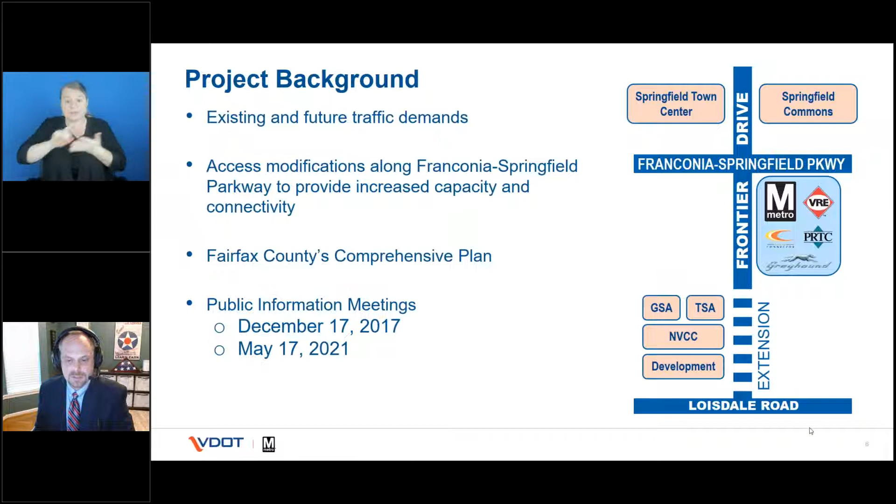This next slide shows the project location area in its entirety. This includes the extension to the south to Loisdale Road, the introduction of braided ramps to the north at the interchange with the Franconia-Springfield Parkway, and the circulation area around the Metro station.

The proposed improvements will enhance traffic operations and traffic safety by providing increased capacity and greater connectivity, provide improved accessibility to the Franconia-Springfield Metro station and businesses located along Springfield Center Drive, and improve pedestrian and bicycle facilities throughout the corridor, all while reducing congestion levels on regional roadways.

Next, to talk about the specific details of the project, Bob Kalbach, our consultant design manager, will walk everyone through the design. Thanks, Andy.

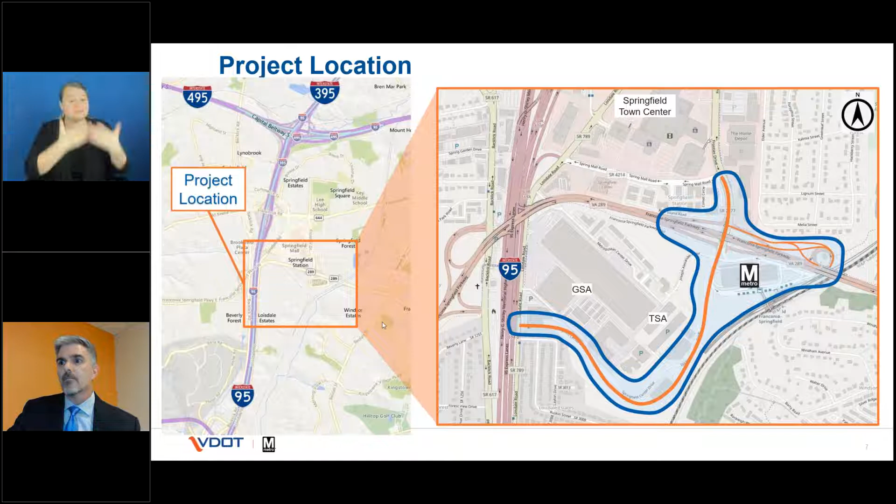Throughout this project, there's been a lot of coordination among VDOT, Fairfax County, WMATA, and adjacent property owners. And through that coordination, the proposed design for the project has evolved over recent years. Tonight, we'll get into the specifics of the proposed design, but first, let's briefly review the design features for this project.

This project can be summarized by looking at three main areas of improvements. The first element is the extension of Frontier Drive from the Franconia-Springfield Parkway interchange and Metro station across Long Branch and down to Loisdale Road. Frontier Drive will replace Springfield Center Drive for the portion of the project that we call the South Project Area. Throughout the project, Frontier Drive will be a 4-lane divided roadway with shared use paths on both sides.

The second element of the project is the modification of the Franconia-Springfield Parkway interchange into a braided ramp configuration to provide operational and safety improvements. Lastly, the project will include access improvements at and around the Franconia-Springfield Metro station site.

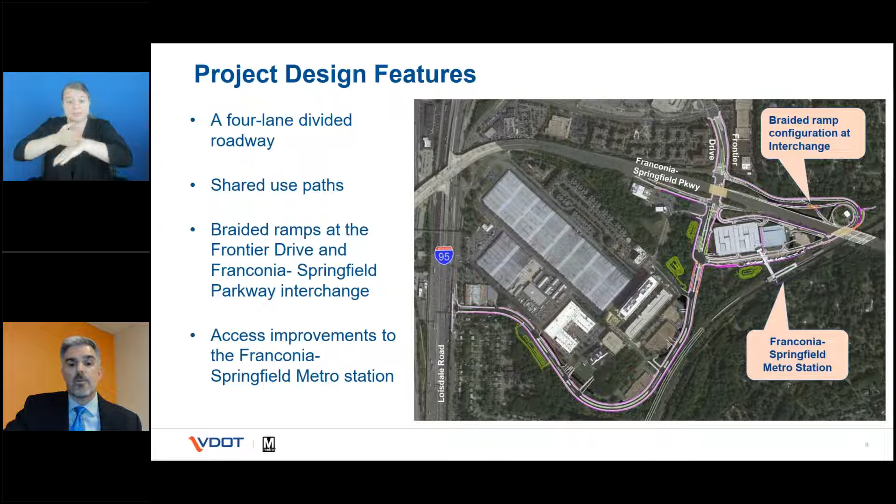This slide shows the current typical section. The overall width is 98 feet, and it contains 2 lanes in each direction, a raised median, and bicycle and pedestrian facilities on both sides. The on-road bike lanes shown in the initial public information meeting for this project in 2017 have been removed.

Frontier Drive will now include a 10-foot asphalt shared use path on the northbound side, that's the south or east side of the roadway depending on where you are in the project, and a 10-foot concrete urban shared use path on the southbound side. The on-road bike lanes were removed in the north section due to the complex interaction of vehicles and numerous traffic movements near the interchange and metro station. For the purpose of consistency, the south section will not include on-road bike lanes either.

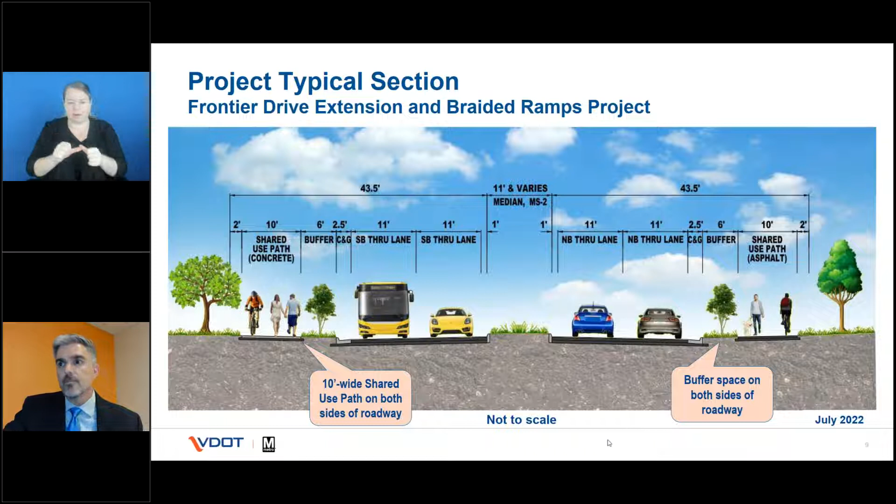Before we walk through more of the project details, on this slide you'll see the legend for the upcoming maps. I won't run through every element, but just to highlight a few items: the proposed roadway is shown in black with the dashed line down the middle, which represents the pavement markings that you'll see on the plans.

The proposed shared use path and sidewalk, or urban shared use path, are shown in bright magenta. The proposed grass median, grass buffers, and other green space are shown in a darker green. The existing right-of-way or property lines are shown using a light blue line, and the proposed right-of-way is shown using a red line. The proposed temporary construction easements are shown in a dashed dotted orange line. The drawings will also show proposed traffic signals, stormwater management basins, bridges, retaining walls, and other project elements, as you can see in the legend.

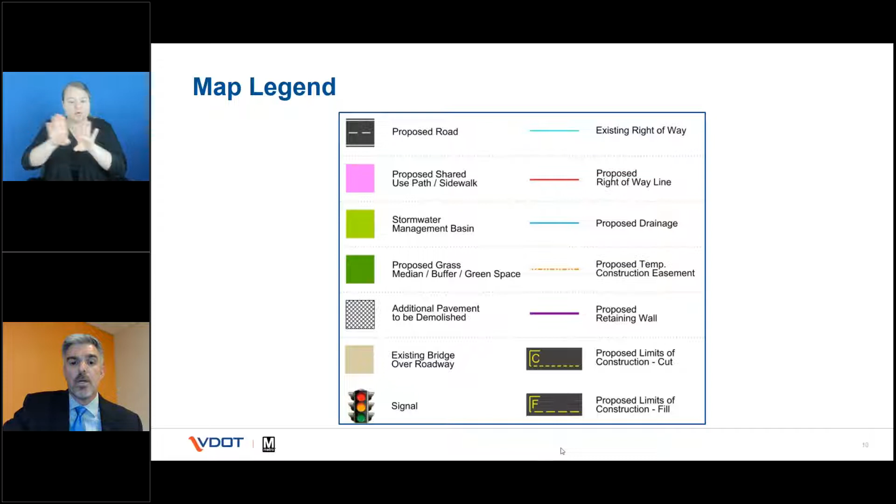Next, we'll focus on the improvements in the north project area.

As a result of continued coordination with WMATA and the completion of a value engineering study on the project in 2018, revisions were made to the 2017 concept and are shown in this slide. This is generally the same information that was shown at the public information meeting last spring.

A main feature of the north project area is the braided ramp configuration of the interchange. This new configuration provides similar movements to the existing interchange, but separates them to avoid conflicts and weaving, to eliminate potential conflicts between vehicles and bikes or pedestrians, and to provide more efficient operations.

Also included is a new connection from the existing trail along the north side of Franconia-Springfield Parkway to the new trails proposed on the outside of the braided ramps, which eliminates the current crossing of the loop ramp. As noted when we were viewing the typical section, the on-road bike lanes were removed due to the complex traffic movements in this area.

The bus layover configuration shown in past meetings has been revised to improve bus operations entering and exiting the lot. However, this is just shown as a shaded area on the plans, as this lot has been designated to be part of a future project.

The intersection at the entrance to the metro station was modified to a jug handle configuration, and we'll discuss that more on the next slide.

In addition, the roundabout planned on the east end of the station site in 2017 has been eliminated in favor of a signalized intersection. This change was a result of coordination with WMATA, considering the planned circulation of the site and future plans for facilities around the area.

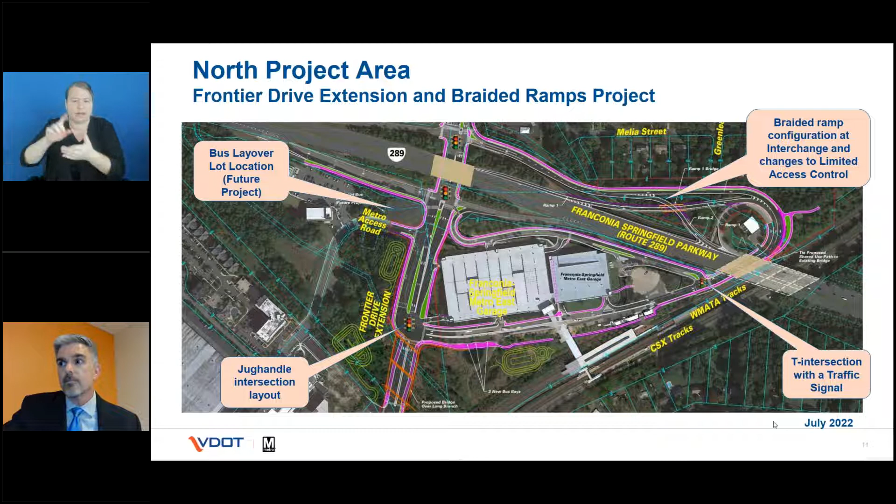This slide provides a zoomed-in view of the area around the metro station, which includes the jug handle intersection configuration, elimination of the roundabout, and changes in circulation around the station.

As noted on the previous slide, the new entrance to the metro station site has been reconfigured with a jug handle. For those not familiar with the jug handle, this is a type of intersection configuration that changes the way traffic turns left at an at-grade intersection.

Instead of a standard left turn being made from the left lane, left-turning traffic, which in this case is traffic on southbound Frontier Drive that wants to turn into the metro station, uses a ramp on the right side of the road. This configuration will also allow vehicles and buses coming from Franconia-Springfield Parkway that want to enter the metro station to stay to the right when they turn onto southbound Frontier Drive.

This configuration improves operations along Frontier Drive and eliminates the majority of the weaving movements that were present in the previous design. Within the metro site, the drop-off area along the median of the station access road has also been removed, which both mitigates a current point of congestion and also allows the median to be reconfigured to allow for the addition of bus layover spaces along the station entrance side of the median.

On the east end of the metro site, the intersection that was previously proposed as a roundabout has been replaced with a signalized intersection, which minimizes impacts to future expansion of WMATA facilities and simplifies pedestrian movements in and around the intersection.

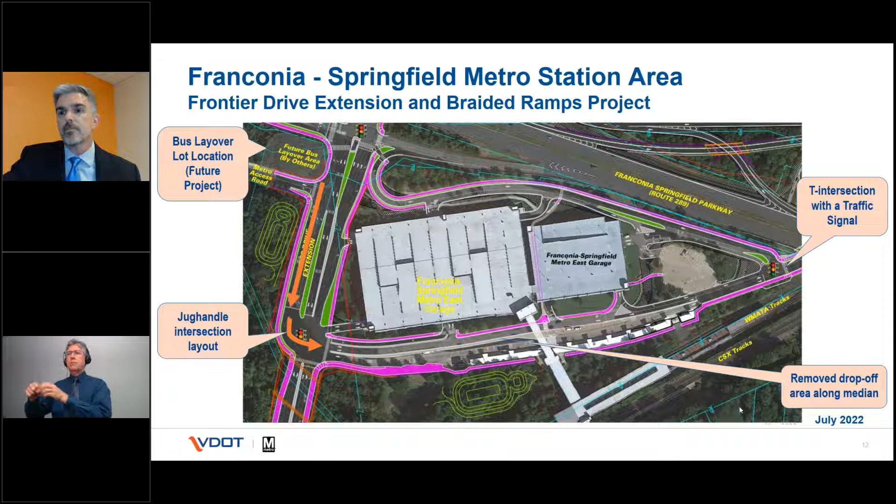Having covered some of the specific changes in the interchange and the Metro site, we'll now walk through the project area from north to south and highlight a few more features of the project.

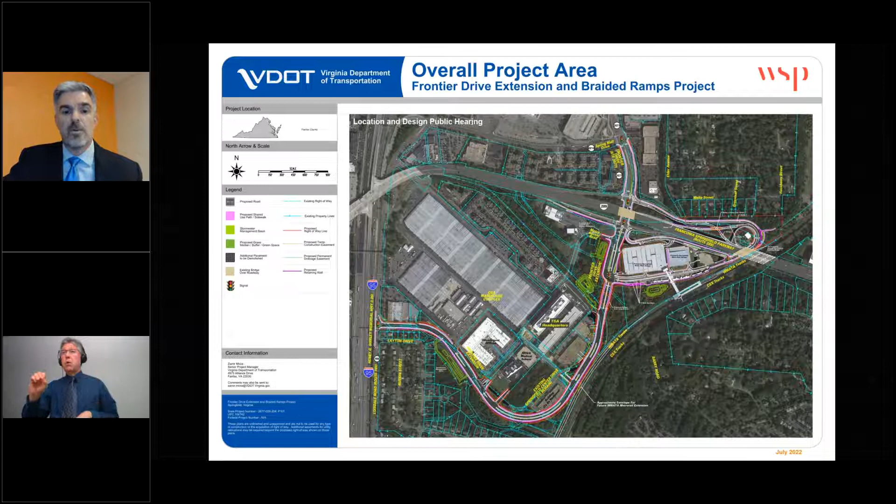First, we'll look at the braided ramps. These braided ramps will improve traffic operations and safety at the interchange by providing the same movements that exist today, but more efficiently and without the weaving that exists today at the ramps to and from the parkway.

The new configuration also includes new and revised bicycle and pedestrian connections that both provide additional connectivity and avoid vehicular conflicts. I would also like to mention that as a result of the preliminary noise study that was performed, the area north of the braided ramps qualifies for a sound wall.

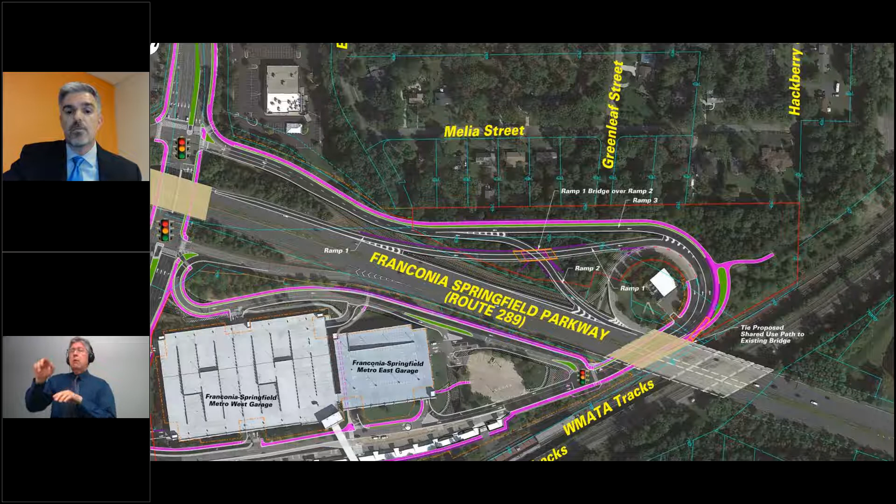These results are preliminary, and a final noise study will need to be performed as the project moves into final design.

Along the north section of Frontier Drive, the proposed changes from the existing configuration are minor, but they do include widened pedestrian facilities on both sides of the roadway that coincide with the removal of the existing on-road bike lanes.

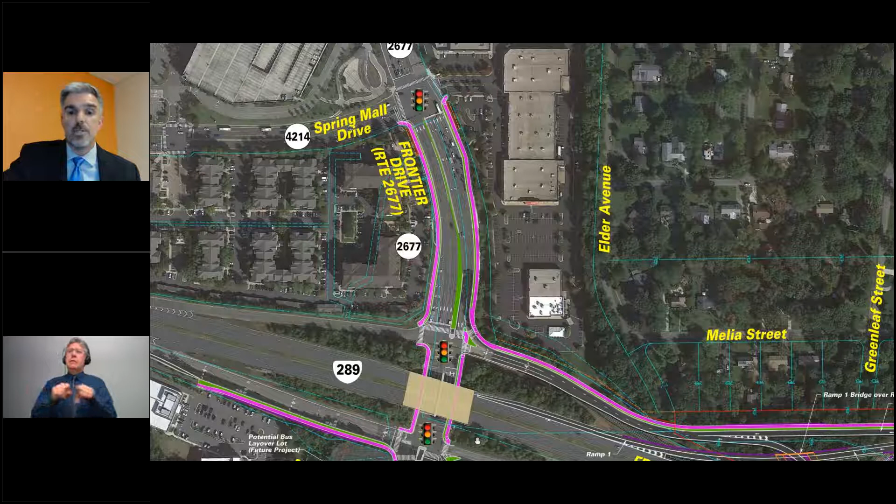At the interchange ramps north of the parkway, which provide movements to and from the westbound parkway, the changes are minor and are associated with the new braided ramp configuration.

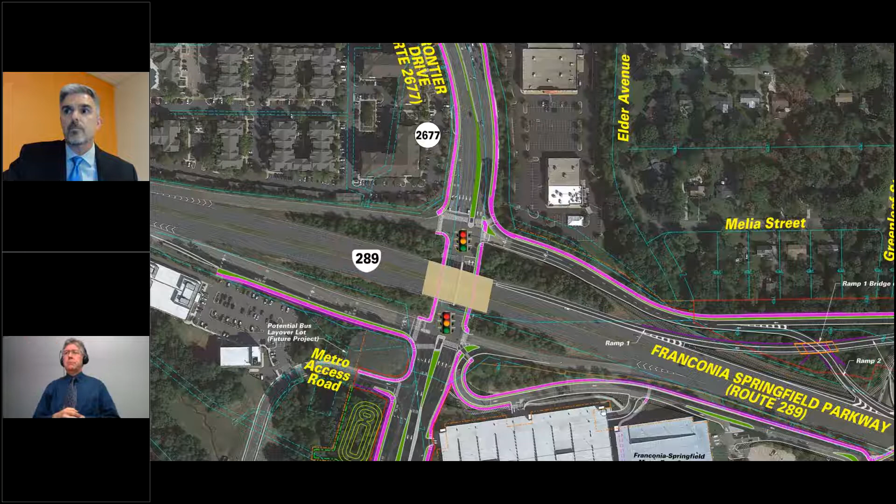At the interchange ramps south of the parkway, the main change is the widening of the ramp from the eastbound parkway to Frontier Drive, which provides one additional lane approaching Frontier. This helps provide additional space for vehicles to queue, and also allows vehicles to choose from 3 right turn lanes based on their destination, with vehicles accessing the Metro station using the 2 right-hand turn lanes, and vehicles continuing south on Frontier Drive using the innermost right turn lane.

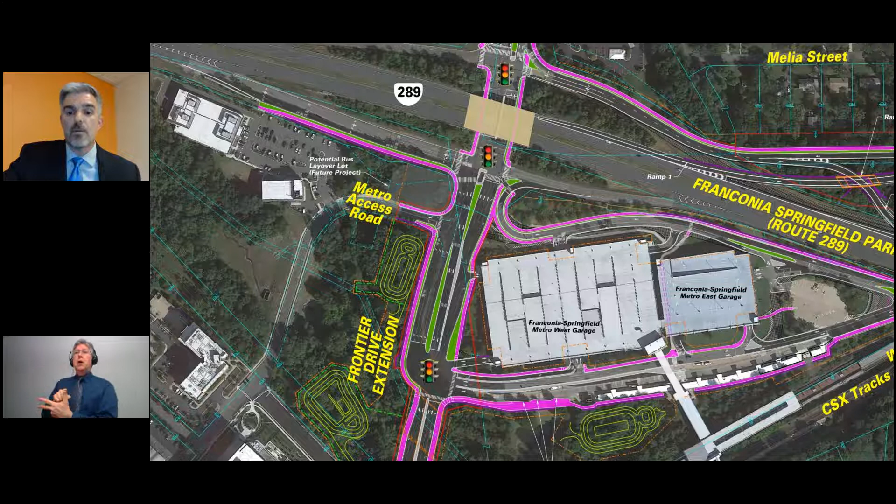At the Metro station property, we already walked through most of the changes, and staff from WMATA will highlight a few other items when we get to the next slides.

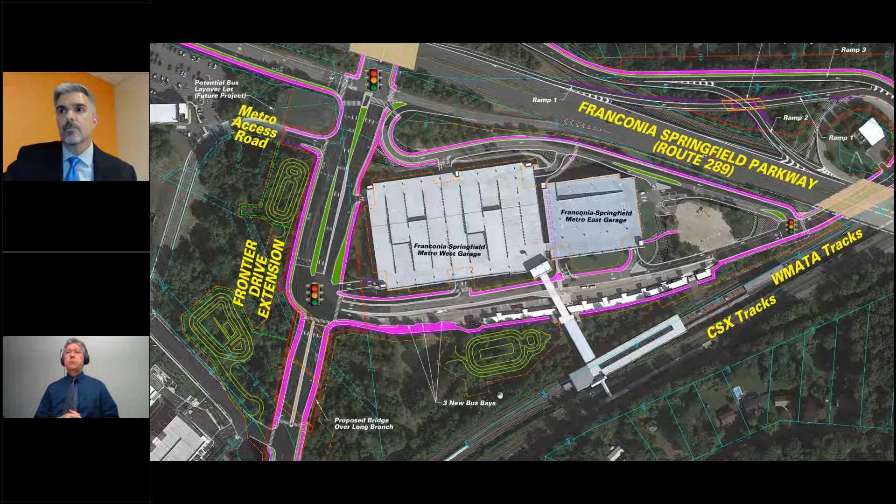The south project area includes the portion of Frontier Drive, or the Frontier Drive extension, south of the Metro station entrance, which starts with a new bridge over Long Branch and continues south to connect to Loisdale Road along the general alignment of Springfield Center Drive.

This section includes the smaller typical section discussed earlier, shown in 2021, to reduce the footprint of Frontier Drive, particularly at the intersection with Loisdale Road. The reduced typical section made it possible to eliminate impacts to the building on the corner of Frontier Drive and Loisdale Road. Through the reduction of the typical section and a retrofit of the existing stormwater management pond, the project was able to reduce the impact on adjacent parcels along Frontier Drive.

The access points along Frontier Drive provide access to the existing properties, as well as to adjust for future phases of the property adjacent to the new TSA headquarters, and crosswalks are provided at many of the crossings.

Through coordination with staff from the Northern Virginia Community College, the access to the NOVA Medical Education Campus was adjusted from what was shown previously to a configuration that provides movements closer to the current access configuration at the campus. In addition, the access to the GSA property was adjusted from the larger access point with 2 northbound left turn lanes shown previously to a configuration that more closely matches the current access.

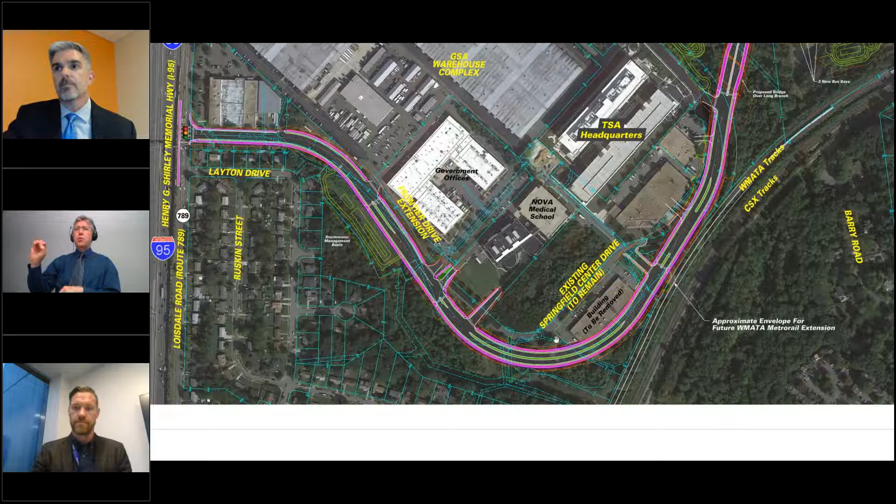First, I'll discuss changes to the station's access. The project would add a new signal to connect the Frontier Drive extension at the Jug Handle intersection on the left side of the graphic. Additionally, the intersection on the right side of the graphic will be reconfigured to include a new traffic signal that will further improve traffic flow and operations.

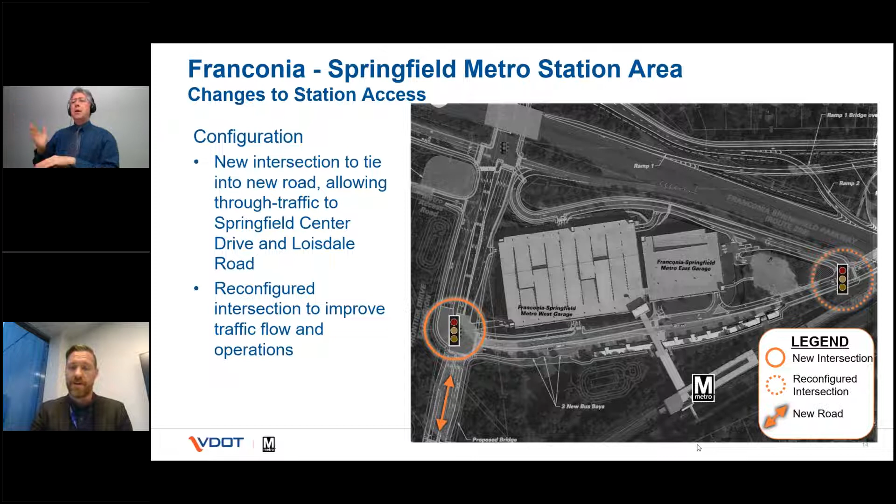On the next slide are the changes to the bus facilities. 3 new bus bays will be added to the existing bus bay area. The project also includes a new bus layover facility that may be built in the future as part of a separate project.

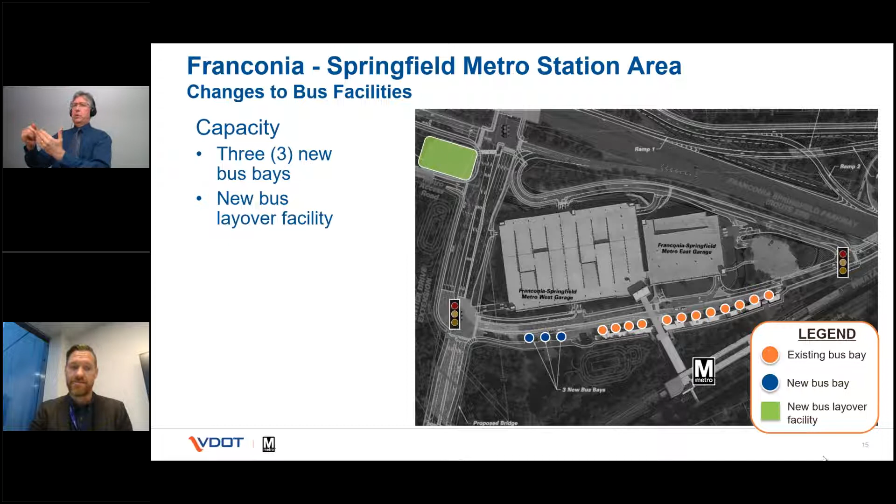The next slide shows changes to the kiss and ride facilities. These changes include the removal of the existing pickup and drop-off area shown in the red dashed outline zone on the map, which will help to further improve traffic flow and operations of the parking garages. There will also be modifications to the access points for the existing kiss and ride garage and the kiss and ride parking lot, highlighted in the orange squares on the middle and right side of the graphic.

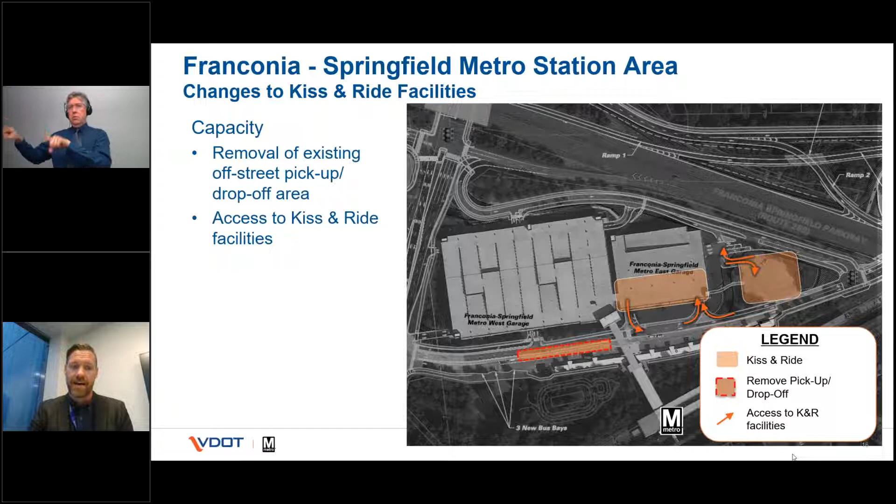On the next slide are the changes to the park and ride facilities. There is no change to the total number of parking spaces that will be available in the garage. However, there are minor configuration changes to 2 of the 5 entrances to the park and ride garage. On the graphic, you'll see the existing gate lanes shown in orange and the new gate lanes shown in blue, needed to accommodate traffic flow and operations. Those locations are additionally highlighted in the red dashed circles on the graphic.

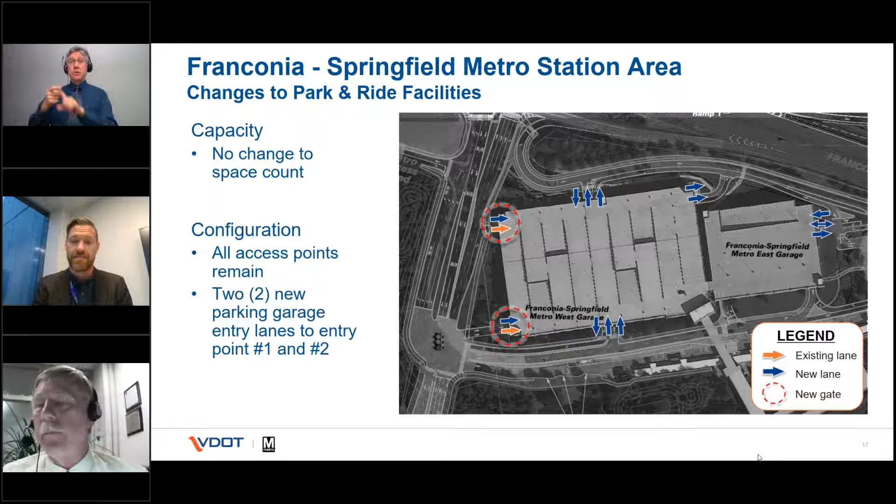I'm John Muse, the VDOT Northern Virginia District Environmental Manager, and tonight I'm going to talk about the environmental assessment, also referred to as an EA, which was prepared for compliance with the National Environmental Policy Act, or NEPA. NEPA was signed into law in 1970 and is required for federally funded projects, which includes this project. NEPA is referred to as an umbrella statute because other applicable environmental and historic preservation laws and regulations, including executive orders, may apply for inclusion into one environmental analysis for a streamlined decision-making process. The lead federal agency is the Federal Highway Administration, and the EA was prepared in accordance with their NEPA implementing regulations in the Code of Federal Regulations. The EA that was prepared details an analysis of the potential environmental effects associated with the proposed project improvements. Next slide, please.

NEPA is a procedural law where it must be demonstrated that proper process was followed. One of the first steps is to determine the significance of the environmental impacts the proposed project is likely to have. The determination of significance requires consideration of both context and intensity, which are defined by NEPA.

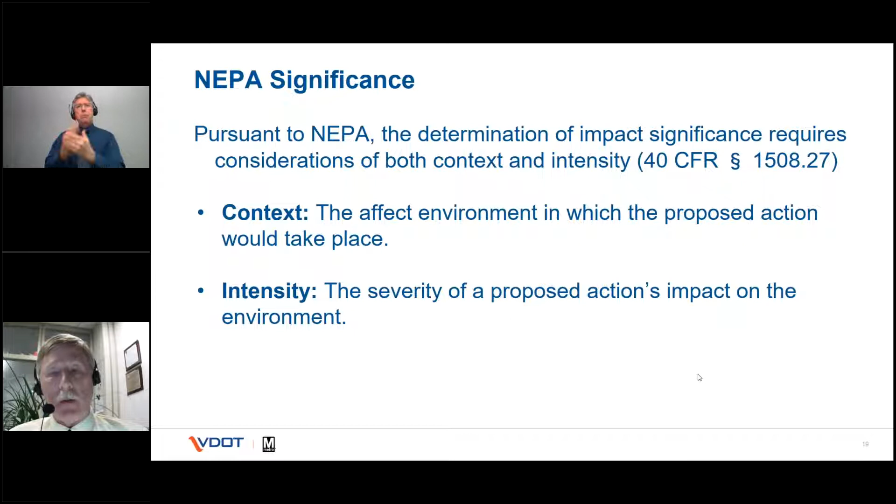On the next slide, you'll see the purpose and needs summary from the EA. The purpose and need is the most important section of the EA as it establishes the reason why the project is being proposed.

This project will address traffic congestion, improve accessibility to local businesses and facilities, improve traffic operations and safety, enhance the overall transportation network connectivity in the Springfield area, and also provide access control that allows for safe crossings of autos and pedestrians at signalized intersections.

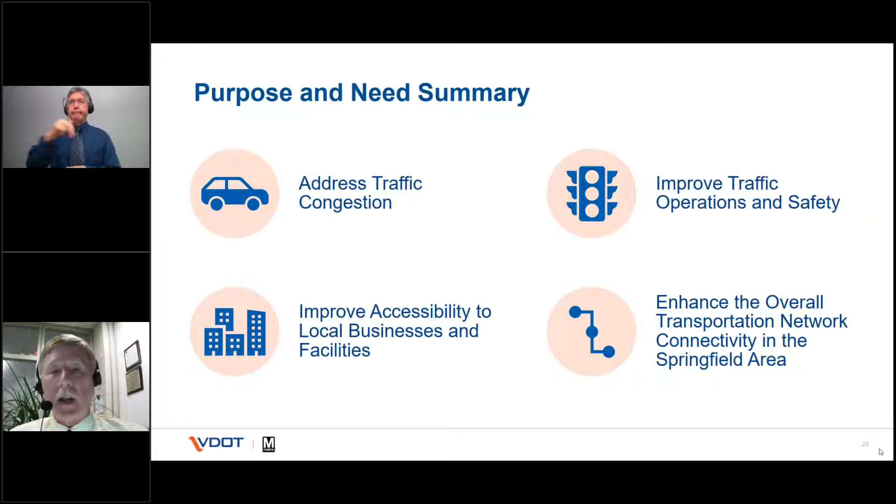On the next slide is an image of the environmental study area, which was used for the environmental documentation. The environmental study area is somewhat larger than the project's design footprint and is centered on the Franconia-Springfield Parkway, bound by Beulah Street to the east, Loisdale Road and the I-95 Express Lane ramps to the west, Springfield Mall Road to the north, and the Franconia-Springfield Transit Center to the south.

A range of alternative options, including no build, were evaluated in the EA to arrive at a preferred build alternative, which is described and presented here tonight. The preferred build alternative addresses the purpose and need for this project.

The potential environmental impacts of the preferred alternative were then assessed for significance. We'll look at a summary of the potential impacts that were evaluated in the EA in the next slide.

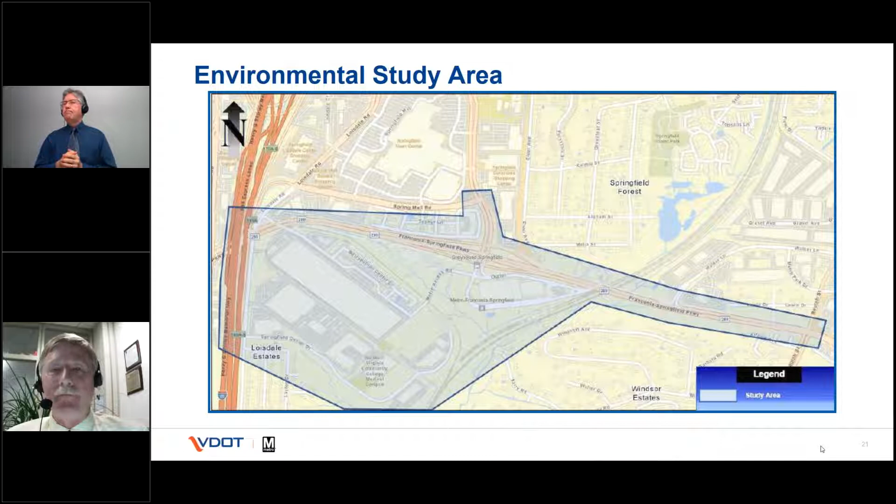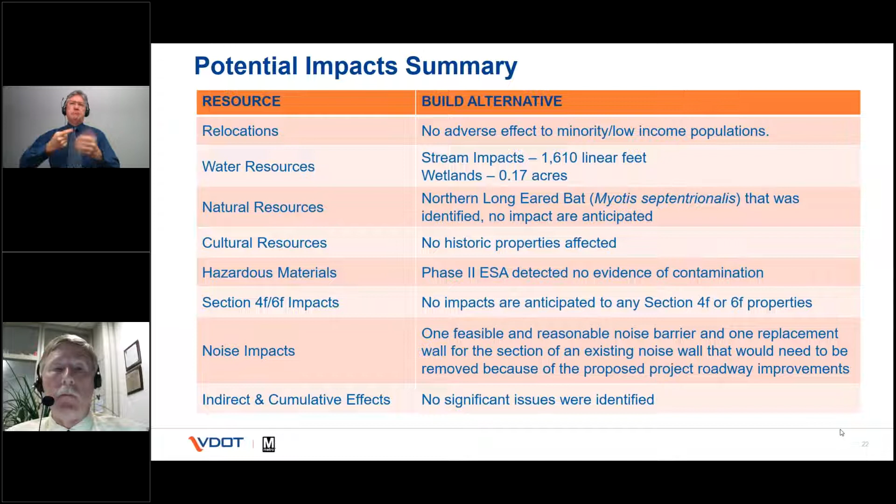Environmental justice, or EJ, is rooted in Title VI of the Civil Rights Act. On February 11, 1994, Executive Order 12898 was signed requiring all federal actions to address environmental justice for minority populations and low-income populations. The United States Environmental Protection Agency defines environmental justice as the fair treatment and meaningful involvement of all people, regardless of race, color, national origin, or income, with respect to the development, implementation, and enforcement of environmental laws, regulations, and policies.

These proposed project improvements will displace 5 businesses, including a school and a cell tower, that may be minority-owned. However, these impacts do not represent an adverse effect to the minority low-income populations as long as these displacements are in accordance with the Federal Uniform Relocation Assistance and Real Property Acquisition Act.

The proposed improvements are anticipated to slightly impact approximately or slightly more than 1,600 linear feet of streams and approximately 0.17 acres of wetlands. These impacts will require permits from the U.S. Army Corps of Engineers as well as the Virginia Department of Environmental Quality. These impacts may be further reduced as the final design is developed.

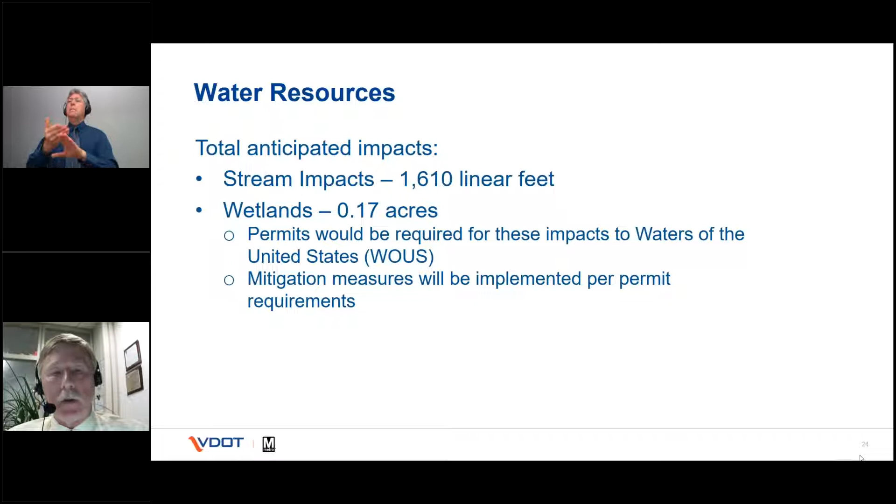Hazardous wastes are regulated by the United States Environmental Protection Agency and defined in the Code of Federal Regulations. Materials are considered hazardous if they are specifically listed by regulations, exhibit hazardous characteristics, are universal waste (batteries would be a good example), or are mixed waste.

The principal objective of performing environmental due diligence is to identify and recognize environmental conditions in the study area, and then conduct environmental site assessments, or ESAs. Information was obtained from regulatory databases, site reconnaissance, available published information, as well as local and state government officials.

A Phase 1 ESA was performed in 2017, which recommended further investigation under a Phase 2 ESA of a former wastewater treatment plant and a vacant office building warehouse.

The 2017 Phase 2 ESA determined that there was no evidence of any regulated contamination on either property. Following some changes to the anticipated right-of-way for the preferred build alternative, a Phase 1 ESA was completed to update what was performed in 2017. The conclusions were that the findings of the Phase 1 ESA remain unchanged.

However, a limited subsurface investigation was recommended to assess any petroleum releases related to an underground storage tank on the Franconia-Springfield Metro station property. The subsurface investigation performed under the 2021 Phase 2 ESA found no evidence of petroleum contamination on the property.

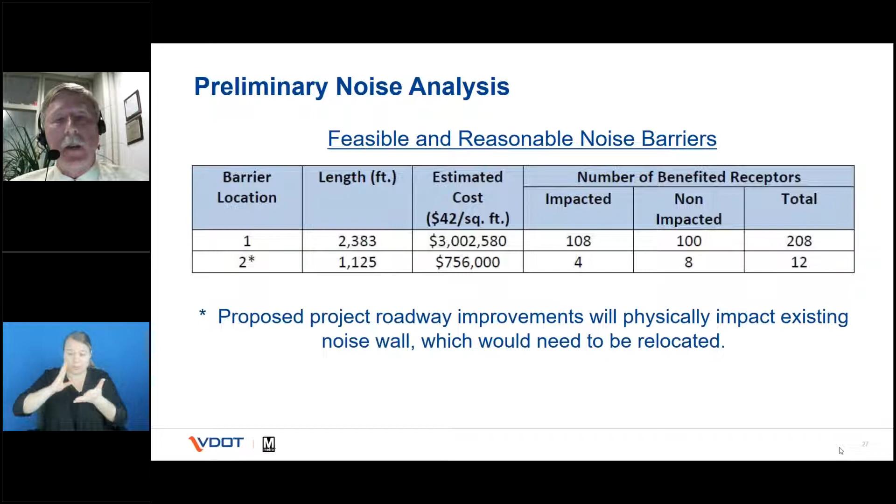At a height averaging 16 feet and 1,125 feet in length, Barrier 2 would benefit 12 receptor properties and provide traffic noise reduction that meets and exceeds the performance of the existing noise barrier. As noted earlier, a final noise analysis will be completed during the final design phase to verify these findings before any decisions on noise barriers are made.

An environmental analysis must be considered for all indirect effects and cumulative impacts for a proposed project. Indirect effects include both known and unknown; unknown effects are reasonably foreseeable or sufficiently likely to occur. Indirect effects for this proposed project are expected to improve overall mobility and connectivity among surrounding land uses and transportation facilities. The cumulative impacts include the total of all impacts, direct and indirect, experienced by a particular resource.

The proposed improvements would contribute minimal incremental impacts to socioeconomic and natural resources, which are not significant under NEPA. These impacts may be further reduced through implementing best management practices during the final design phase of the project. Next, we'll talk about the public availability of the EA.

The NEPA process allows transportation officials to make project decisions that balance engineering and transportation needs with social, economic, and natural environmental factors. During this part of the process, a wide range of partners include the public, businesses, interest groups, and agencies at all levels of government to provide input on the project and environmental decisions.

Engaging public involvement is an essential step for making a final decision, and the EAs are now available for your review on the project website. In addition, the preliminary noise technical report and other appendices are also available for your review.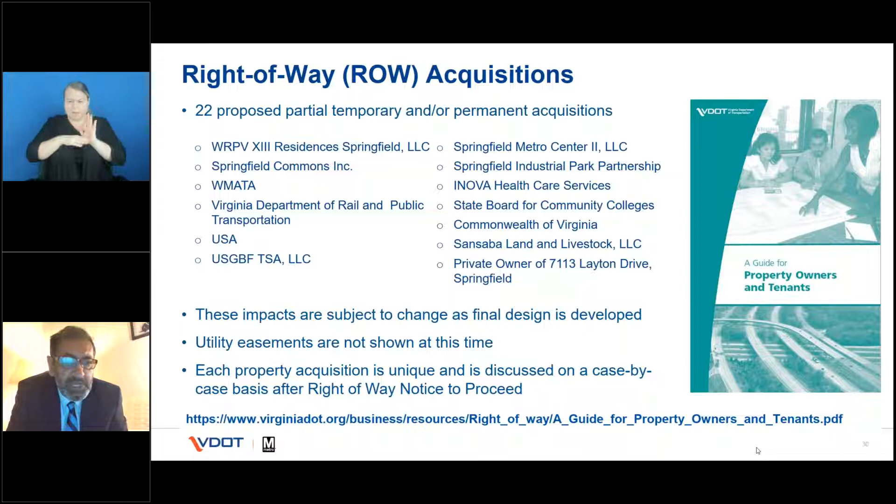Next, we move on to the estimate of the design build project cost and funding. Before I go over these costs, I should explain that these are the projected estimated costs for the project if it is fully funded for the right-of-way and construction phases. Previously, we shared the current cost of the project without inflation factors and without knowing if and when the project would be funded.

The project construction cost is approximately $167 million, for a total cost of $221.7 million. All of these numbers are subject to change as the design is developed in further detail and when the funding is in place.

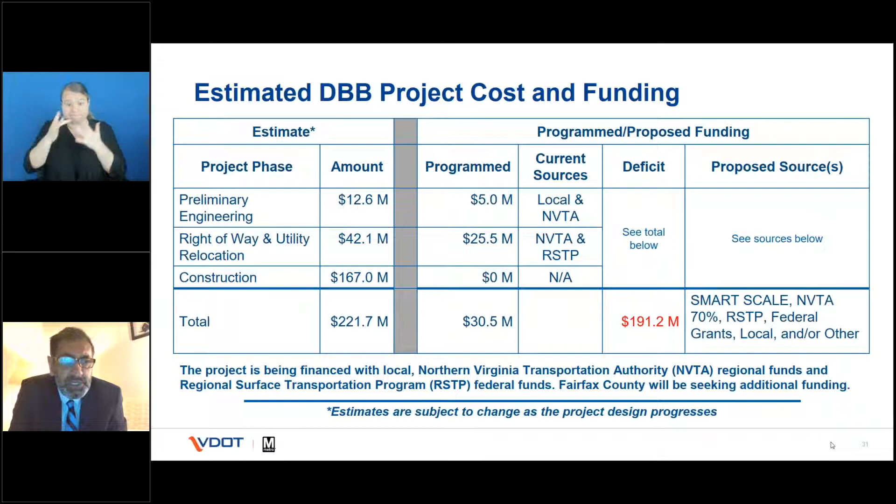After that, we will begin work on the detailed design plans. Then the next phase of the project will be the right-of-way and utility relocation stage. This is when we acquire the necessary rights-of-way from the affected property owners along the corridor. This is also when we will protect and, if necessary, relocate the utilities affected by the design. This is usually quite a lengthy process and is expected to take several years. The start of right-of-way acquisition, utility relocation, and construction is all dependent upon funding.

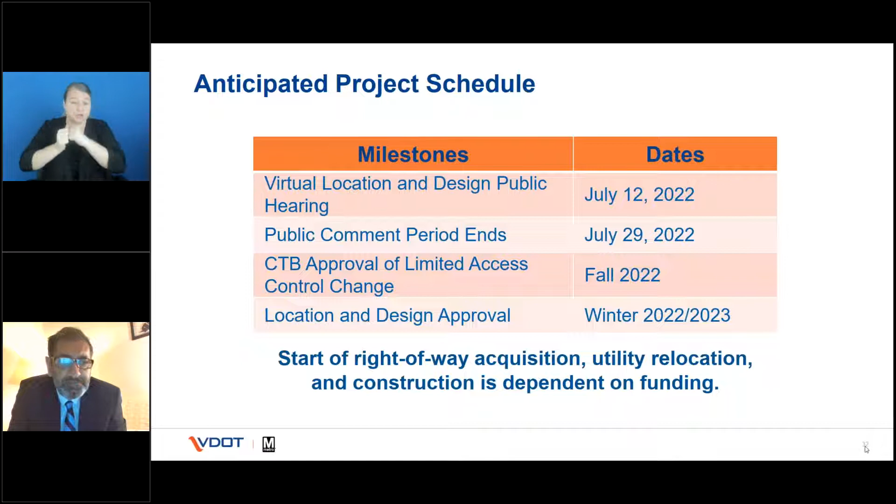So here are the next steps. We will continue our coordination efforts with WMATA, Fairfax County, and the project stakeholders. We will seek design approval and issue a public hearing staff report once the comment period is closed. And from there, we will work on the final design, depending upon the funding.

So at this point, I'd like to turn it over to Carol to talk about the comment submissions and the process for comment submissions before we start the question and answer session. Thank you, Zamir. If we could move, thank you.

We have several ways for you to send us your comments in addition to providing them this evening. You can send your comments either to VDOT or Metro, and we will make sure to share any comments either agency receives with each other. The methods include emailing at meetingcomments@vdot.virginia.gov or to Franconia@wmata.com. You can also mail your comments to VDOT's Northern Virginia District Office, 4975 Alliance Drive, Fairfax, Virginia, 22030, and the WMATA Office of the Secretary at 300 7th Street Southwest, Washington, D.C., 20024. You can also use the comment form on the study website at virginiadot.org/Frontier Drive Extension.

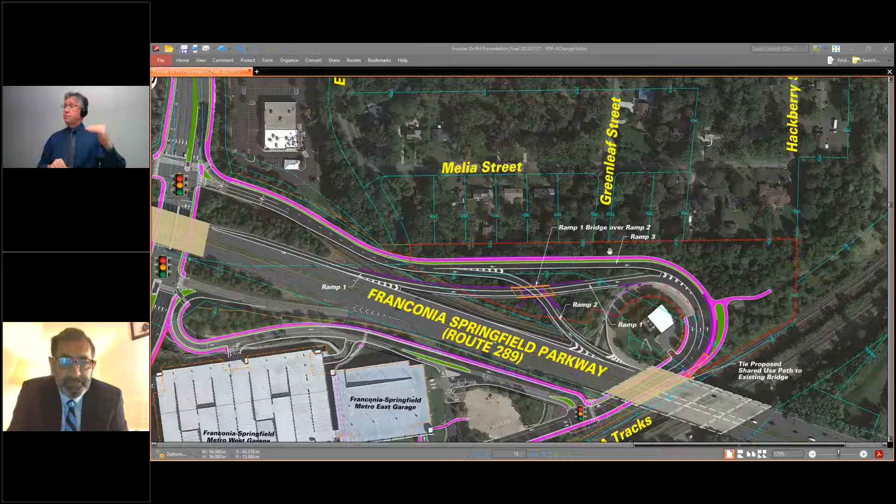Thank you, Zamir. The next question comes from Odette. She would like to know if the drop-off and pickup area is removed from the outside lanes of the metro station, where will it be relocated? I anticipate more congestion moving through the first floor of the additional parking lot during peak hours.

So this is a two-part question. The first part, Stephen, do you want to say a few words about the philosophy of the park and ride or the drop-off area? Can you ask that question one more time to make sure I heard it correctly?

Sure. So she asks if the drop-off pickup area is removed from the outside lanes of the metro station, where will it be relocated? She anticipates more congestion moving through the first floor of the additional parking lot during peak hours.

So there are a few areas for pickup drop-off activity, or what we call kiss and ride, at this station. The primary point is on the ground floor of the east garage, just to the right of the pedestrian bridge in this image. That is the location we are trying to direct kiss and ride or pickup drop-off customers to use primarily. Additionally, there is a second kiss and ride lot, a surface lot further to the right, and that's where we're directing customers coming from either the east or west sides of the site to use.

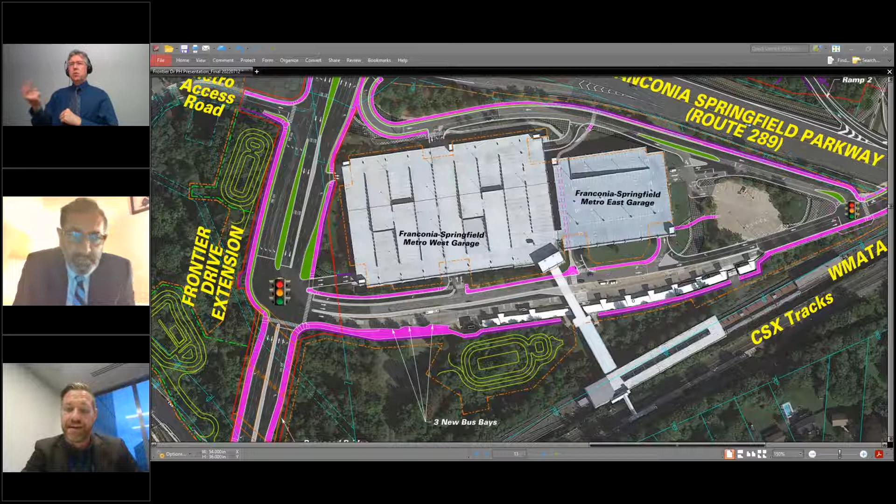Thank you, Stephen. Samir, our next question comes from Frank. He asks, what is the current anticipated schedule for the completion of the Frontier Drive extension?

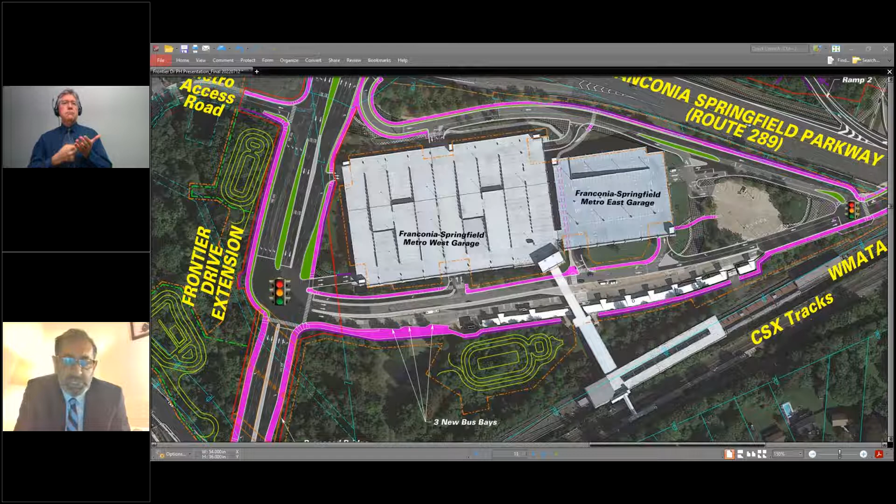If I can refer you back to my explanation on the slides regarding cost and schedule, the schedule is a little indeterminate at the moment because we have no visibility on the status of funding for the right-of-way acquisition, utility relocation, and construction phases. At the moment, we are only working with the preliminary design. Once the project is funded, we will start the detailed design after we get design approval. The next stage after the detailed design is started would be the right-of-way and utility relocation phase.

So again, it all depends on when funding comes into place for the project. Once the right-of-way phase is completed, which is likely to take quite a long time since we have to acquire the right-of-way and then relocate the utilities, a significantly long period is required, up to about 2 or 3 years. Then once the right-of-way phase is over, we will develop the design for the construction plans.

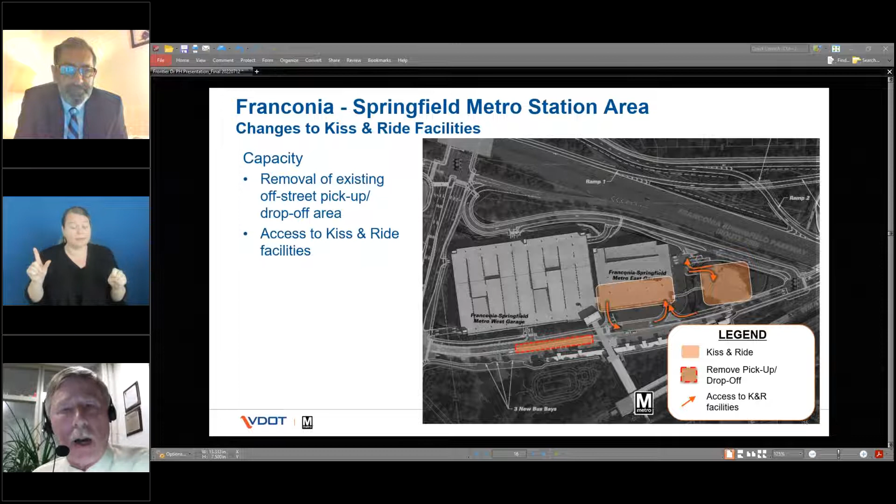I'm hoping John can address this. Well, the NEPA document didn't evaluate an exact count of tree canopy, but it did indicate there could be up to 22 acres of forest land impact. Again, this is based on the current preliminary design, but those figures could be further reduced as we go into the more detailed design phase. That's really the information I can bring up for now, but we don't do a tree canopy count as part of the NEPA process.

But the EA, if you go to the website, has an impacts table that talks about forest land, about 22 acres. The total project area, just as a general statement, is about 190 acres, and of that, 22 acres of forest land under the current concept design is anticipated for impacts. As far as mitigation, there are no plans for mitigation, but Zamir, are there any plans for landscape design with this project? Yes, I believe there is going to be landscape included, also lighting. But again, that will all come to light in the detailed design stage.

Thank you, John and Zamir. The next question comes from Henry. He asks, how high will the new sound walls be? What are the wall materials? And is there a slide that shows the sound wall locations?

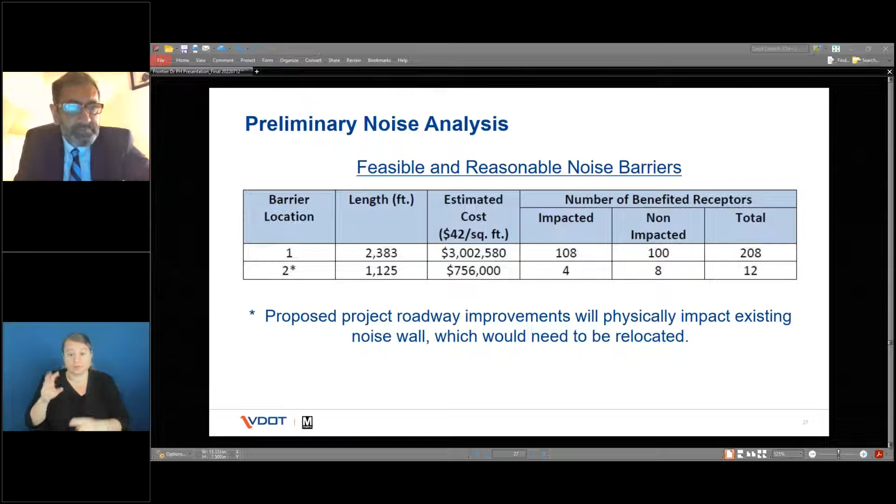The next question comes from Willie. He says, with the Frontier Drive extension, you are proposing losing a building with businesses and leaving two abandoned buildings. I believe that's a comment. Can you confirm that, Zamir?

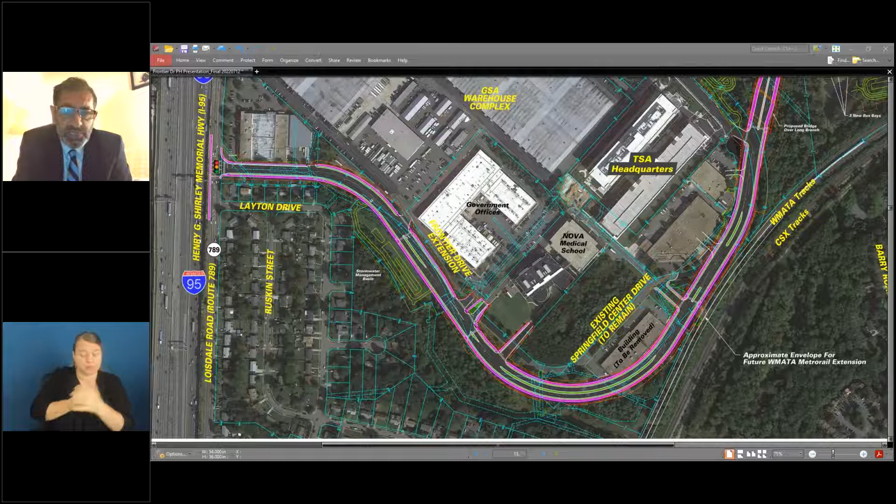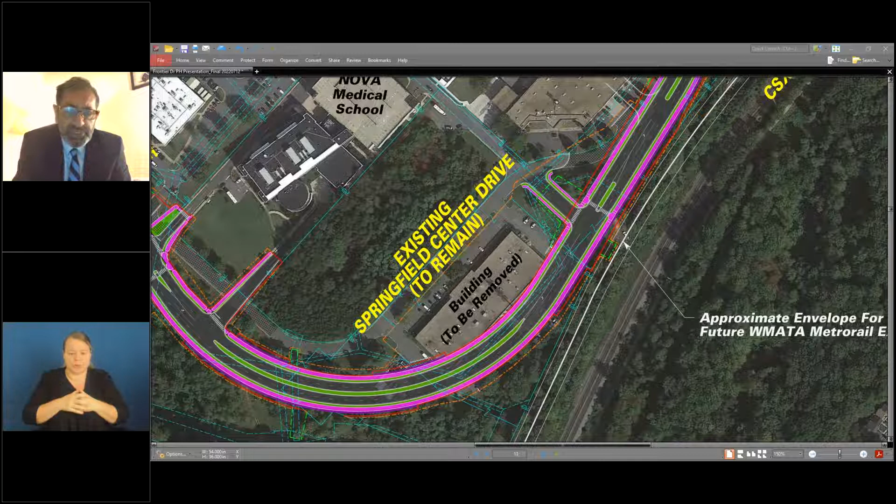As you can see from this slide, we are acquiring that building. If we focus in on it, it does have several businesses inside, and this was unavoidable given the geometry of the road and the proximity of the metro and CSX track that is there. We just could not avoid impacting that building.

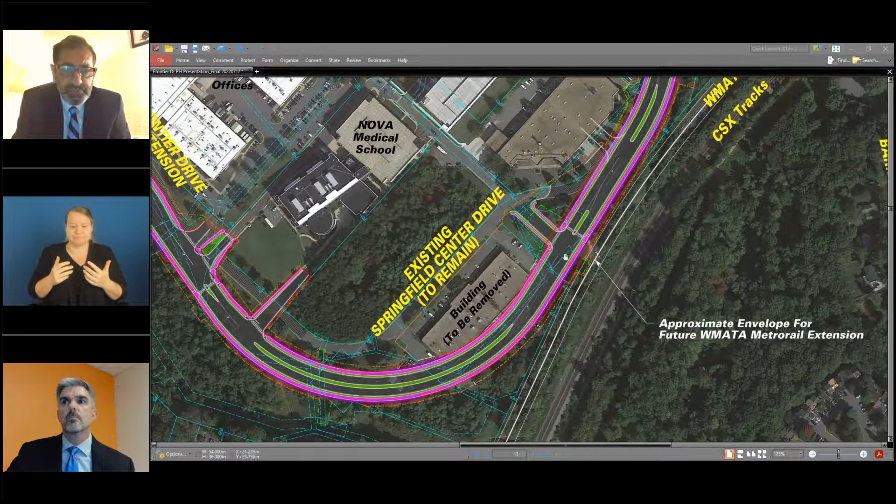As we've been in touch with the owners of that building, they are aware that all the businesses there will need to be vacated when the project funding is made available for the right-of-way phase. That is one total take that we have on this project.

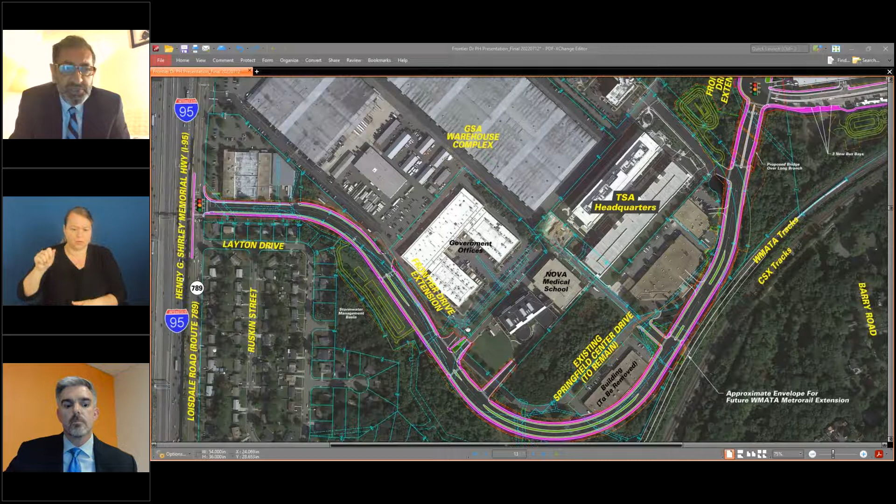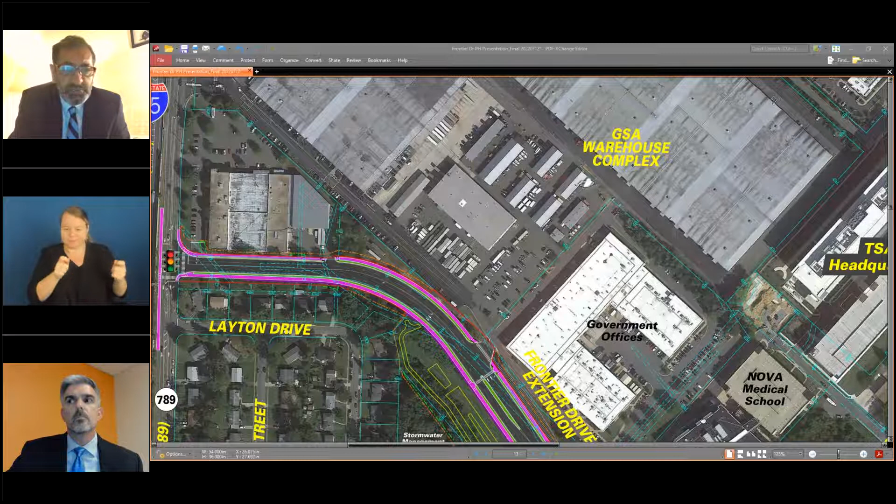We did have another building at the beginning of Loisdale, at the Frontier Drive at Loisdale Road end, where we were able to save this building just north of the intersection. That also had several businesses in it, and we were able to modify the design to avoid impacting that building. So that was something we could accommodate, but the one I spoke of earlier was completely unavoidable, and we were not able to save that building. However, there will be significant land vacated that can still be maintained by the owner of that building.

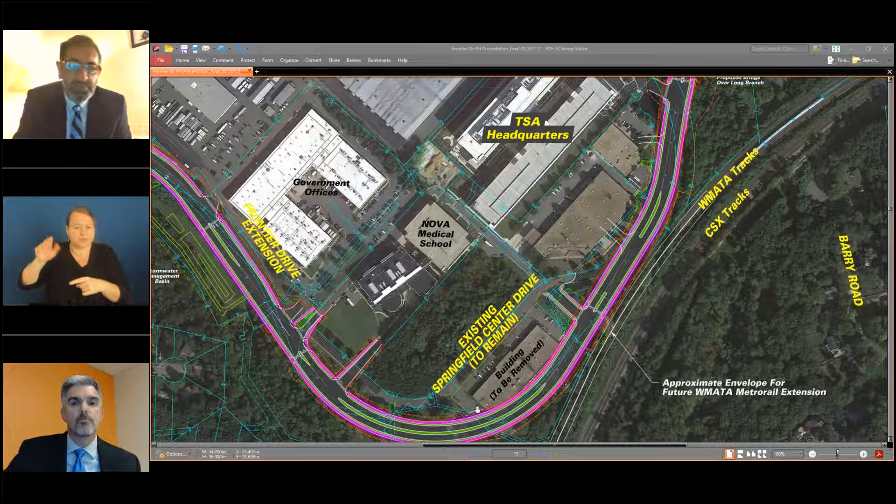Zamir, just to clarify, I think the two abandoned buildings raised in the question are part of the TSA headquarters. It's owned by the same property owner that developed the TSA headquarters, and it's part of a future phase of that development. Those buildings have already been acquired by Boston Properties. That is clarification that we are not impacting those two properties. They are owned by the same owners as the TSA headquarters, and they do have plans to develop those parcels.

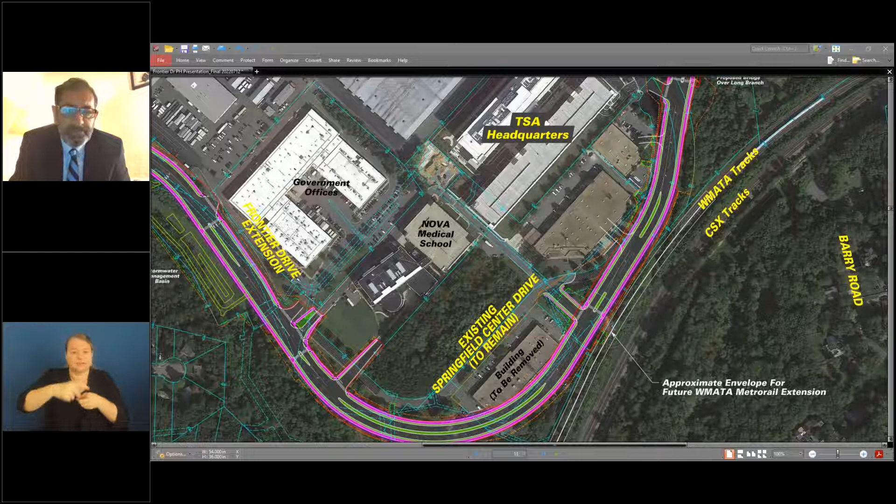Thank you all. Okay, Zamir, our next question comes from Jim, who wants to know: can VDOT please fix the signal at the intersection of Springfield Center Drive and Loisdale before unleashing the additional traffic from the extension of Frontier Drive? Currently, people turning right from Springfield Center onto Loisdale trigger unnecessary red lights in both directions on Loisdale.

Yes, we're familiar with the traffic problems on Loisdale Drive. As might have been mentioned, we are upgrading the signals at this location. I believe they were recently upgraded as well—Bob, if you're familiar with that. But we are modifying the signals for the project during the construction phase as part of our project.

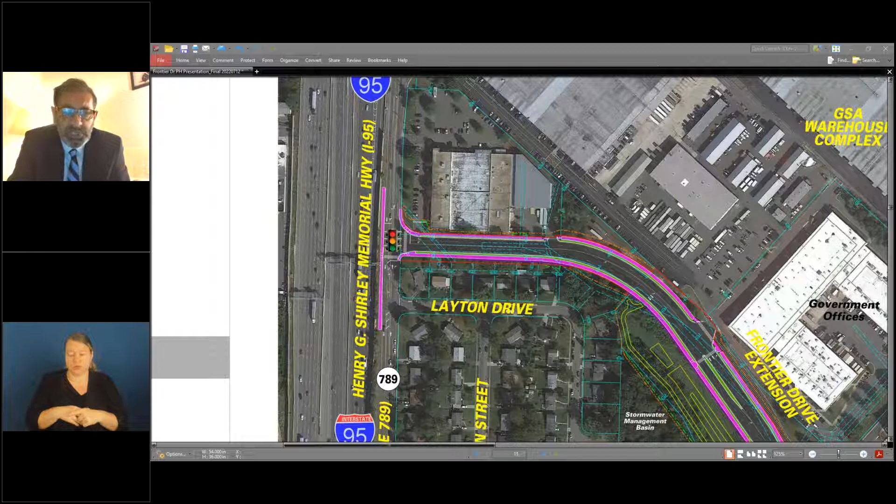Okay, thank you, Zamir. The next question comes from Philip, who asks: improved bicycle access is appreciated. The project should include repair and maintenance of the existing bike path running west from Metro to Loisdale, just south of the Parkway. Yeah, I think that's been brought up earlier in this session, and we will be coordinating with the county bike and ped group to look at that facility and get it into a usable and safe state. So that's something we're going to coordinate with the county on, because we still haven't established who maintains that current path facility.

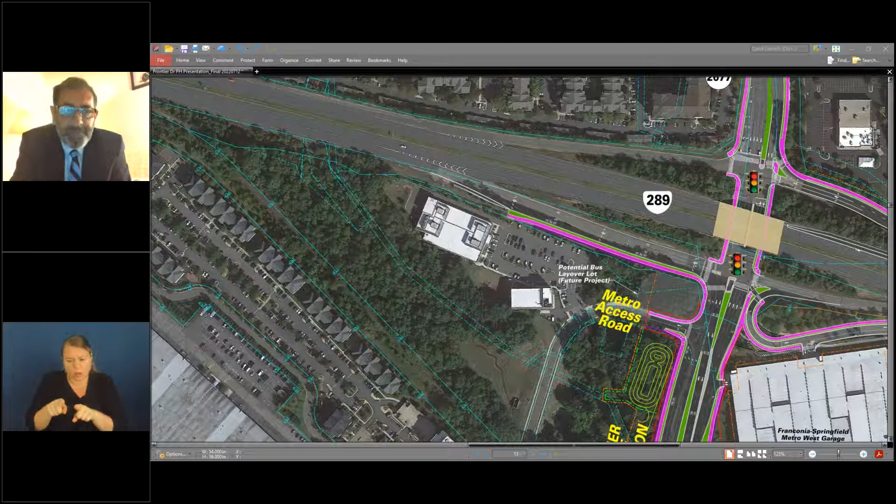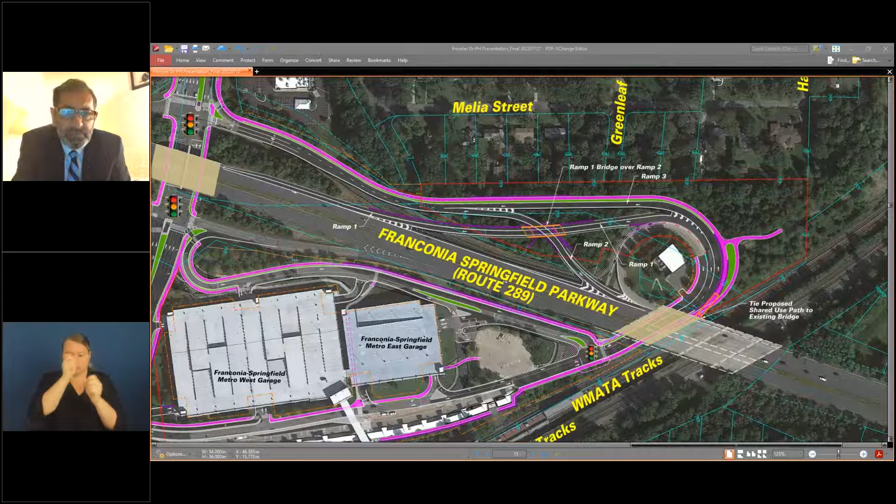I'm interested in the changes along Melia Street. You stated that you're moving the road closer—thanks for putting that graphic up—to the property lines. None of the properties will be acquired there. Is there any determination yet as to when in the construction phase the sound wall would actually proceed? I believe you did confirm pretty certainly that a sound wall, at least the size if not larger than what is currently there, would be replaced. Has the timing been determined for that?

No, is the simple answer to that. But in previous public information meetings, we've had the same concerns voiced to us, and it's a valid concern, and we're very sensitive to it. I want to convey the same answer I did before: VDOT does not control the contractor's work program in terms of where and when he wants to start his work, but we do encourage them to be appreciative of the community's concerns. We usually hold what we call a 'pardon our dust' meeting prior to construction, where everybody in the community is invited to voice their concerns. While the contractor has probably already figured out how he's going to build this after he wins the award of the contract, we will interact with the contractor to encourage them, if they can, to accelerate this area of work that concerns your community.

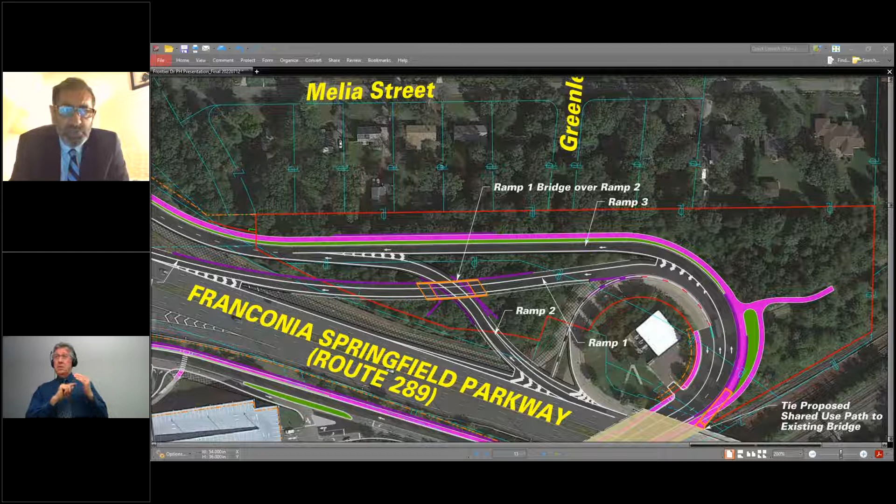So I think we're talking about a private facility in the building that we are demolishing. I'm not sure exactly what the name of that school is, but I think there is a school contained within that building. I don't know the name of it. Is that the... sorry, Rivermont School? I'm not familiar with the name of that school. I think we do have it somewhere. I think, John, in the EA, we did mention the businesses that are in that building.

I don't know if Steve is there. Zamir, that is the Rivermont School, and they actually moved from their current location in September because they knew the project was coming, is our understanding. That's correct.

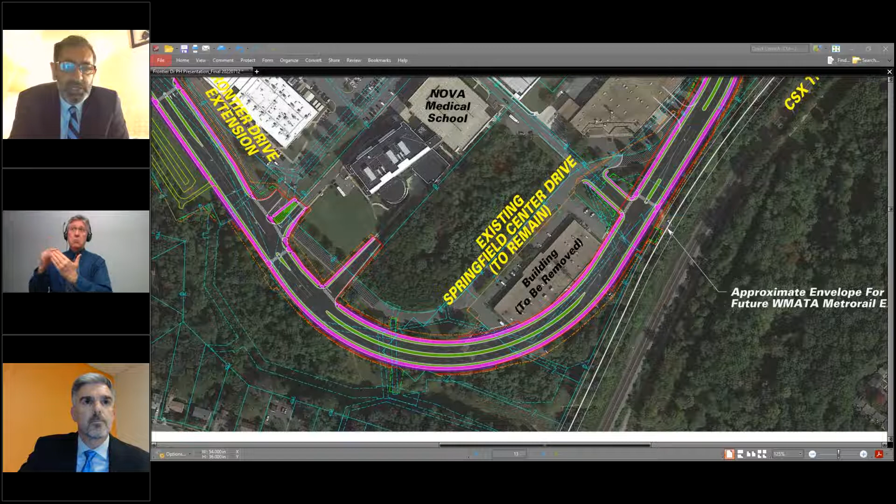Thank you all. Zamir, the next question comes from Pam. How much of the private property on Lois Drive is going to be acquired?

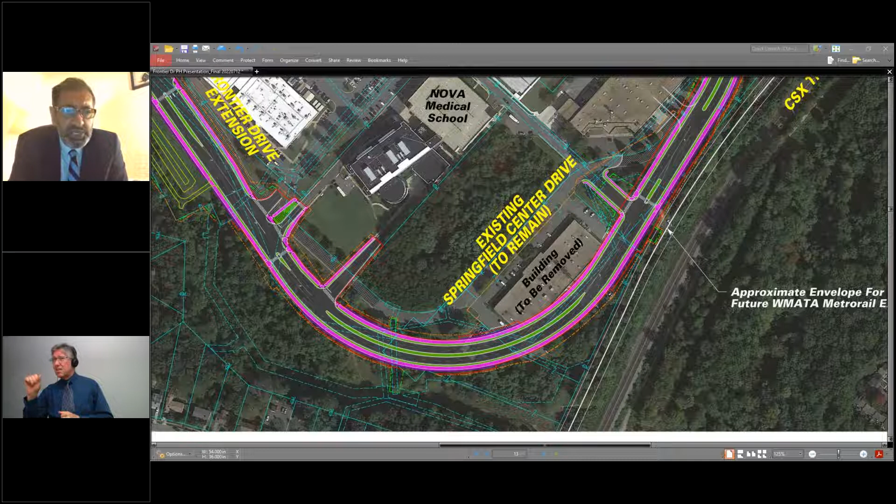So currently, sorry, Loisdale Drive, is that, can we go to that area, Bob? I think if she's talking about Loisdale Drive, I'm not familiar with where that is. So what was the question again? Yep, she asks, how much of the private property on Lois Drive is going to be acquired? She's typed it out, L-O-I-S Drive. Okay, I don't know where Lois Drive is. Do you know where that is, Bob?

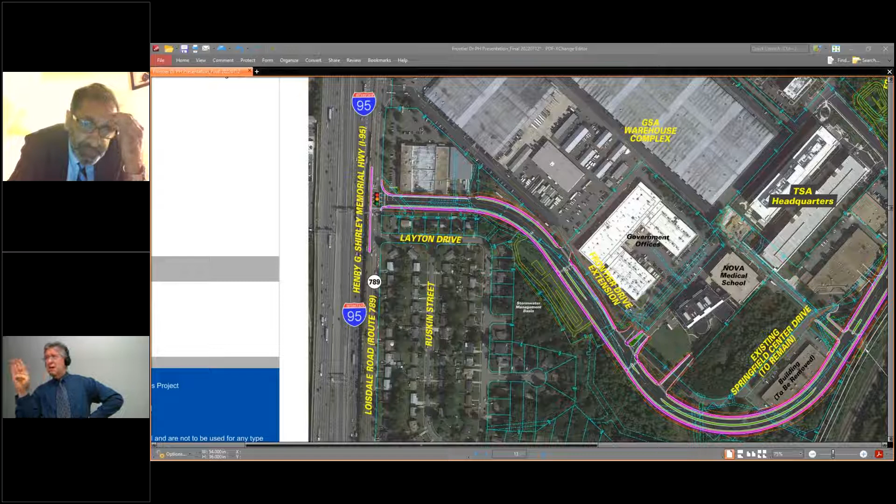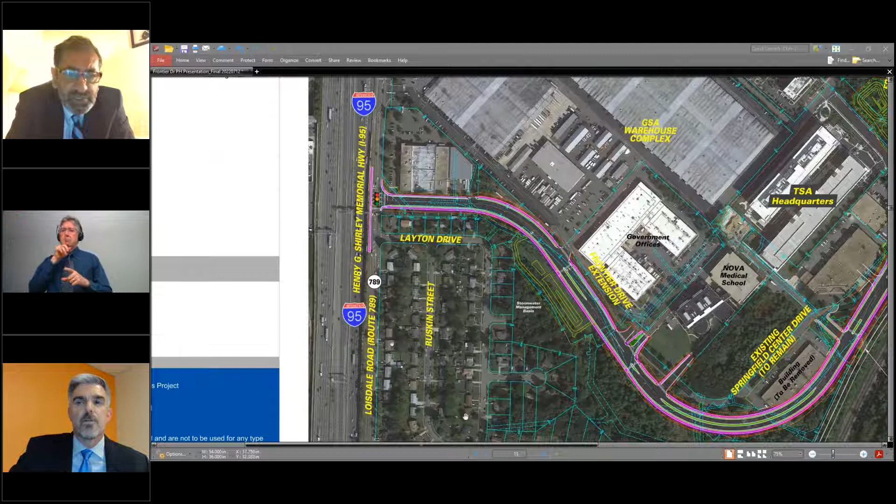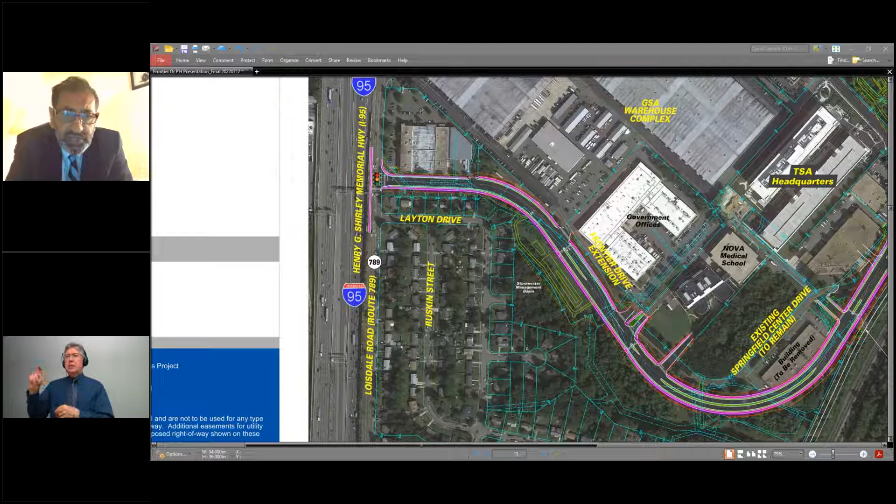So to be... go on. Sorry, Loisdale Road is beyond the limits of the project. Okay, we're not impacted on this exhibit. So the only community that we're impacting, very slightly actually, and probably not even any, is the few houses that abut Springfield Center Drive off of Layton Drive. And I believe a significant portion of that is privately owned, as is the current Springfield Center Drive. Springfield Center Drive Road is a private road, it's not a VDOT road. So we'll be acquiring all the necessary right-of-way for this project.

Thanks, Zamir. Our next question comes from Philip, who asks, it appears the stormwater control ponds will come at the expense of tree canopy. Can't we preserve trees by putting stormwater control chambers beneath pavement?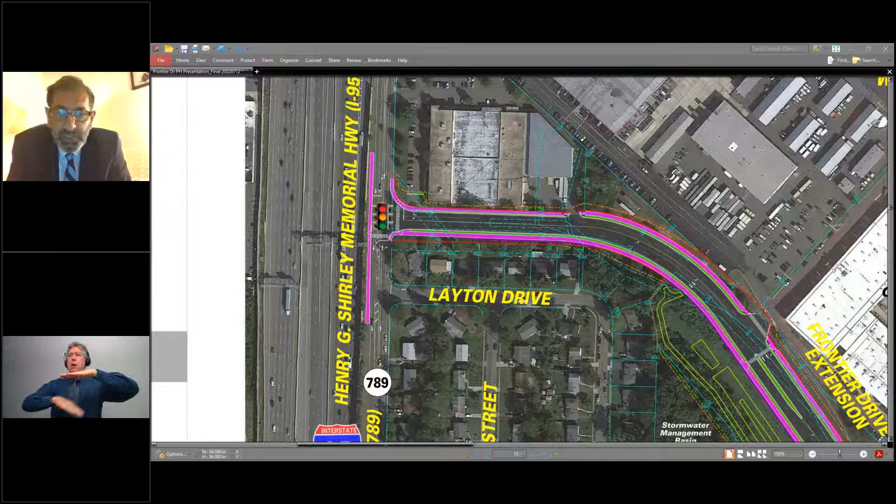So let's just zoom into that area, Bob, because I want to explain that. Or Bob, maybe you want to just clarify which ones are we talking about? Are we talking about the ones showing here on this slide, or... These do look like they will be affecting quite a significant area of trees.

What we're showing now, as the commenter noted, are at-grade ponds, which would be your standard VDOT stormwater management approach, and much easier to maintain. As the design progresses, we can look into other options, such as underground storage, but that'll be investigated as the design advances.

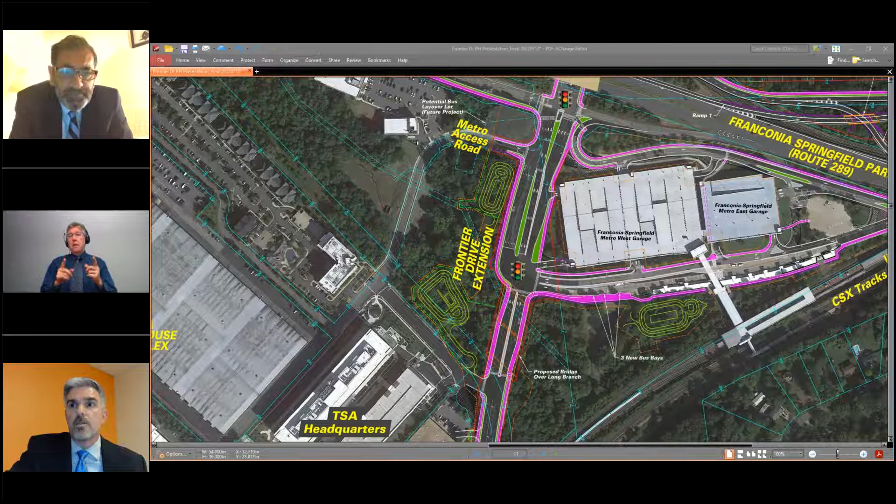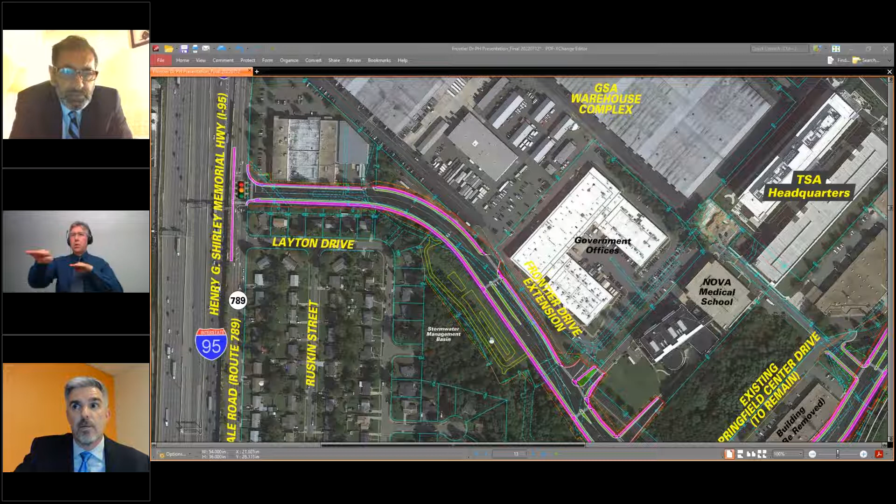So these are the three new ponds. The other one that's down along existing Springfield Center Drive is really just a retrofit of the existing pond. It's being slightly expanded to accommodate some of the additional pavement that's being put out there, but in general it's just a small expansion of the pond that's there now.

Thank you, Bob. Our next question comes from Rosemary. She wants to know, has there been any discussion about establishing a special tax district to tax people nearby to help pay for the project?

I'm not aware of it. That would be a county decision. Yeah, Zamir, this is Tom—there's been no discussion of establishing any kind of special tax district to pay for the project.

Thank you all. Our next question comes from Philip. He says environmental impacts are cumulative for all projects in the area. Are impacts of other projects considered, especially the Atlantic Gateway Railroad expansion?

John, are you familiar with that? I'll just do the first part of the question—are other projects considered? Yeah, those are reasonably foreseeable, both ones in the near future or already completed. Some Atlantic Gateway projects did include improvements to the 95 corridor, some express lanes. Those are mentioned in the EA.

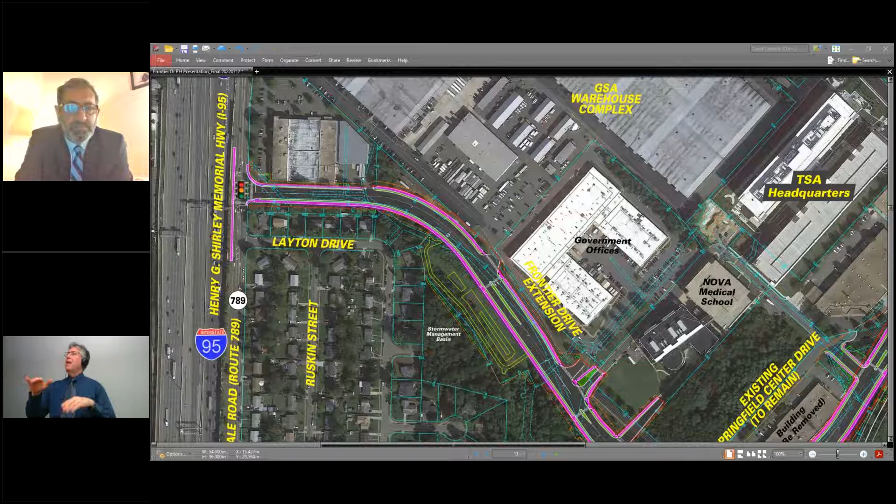Okay, thank you all. Our next question is from Henry. He says, how is the pedestrian crossing controlled to access the kiss and ride? Is there an electronic stop sign, or do you dodge the cars?

I think we have at-grade crossing points—if we can just highlight those on this exhibit. Just to clarify, there's really no change to the access that's out there today. The kiss and ride is currently on the ground floor of the east garage, and there's currently at-grade crossings there. So someone accessing the kiss and ride or the metro station from the kiss and ride would be on the same at-grade crosswalks as are there today, or the other option is they can take the elevator and cross the bridge into the metro station itself. So it's really the same two options that are there today.

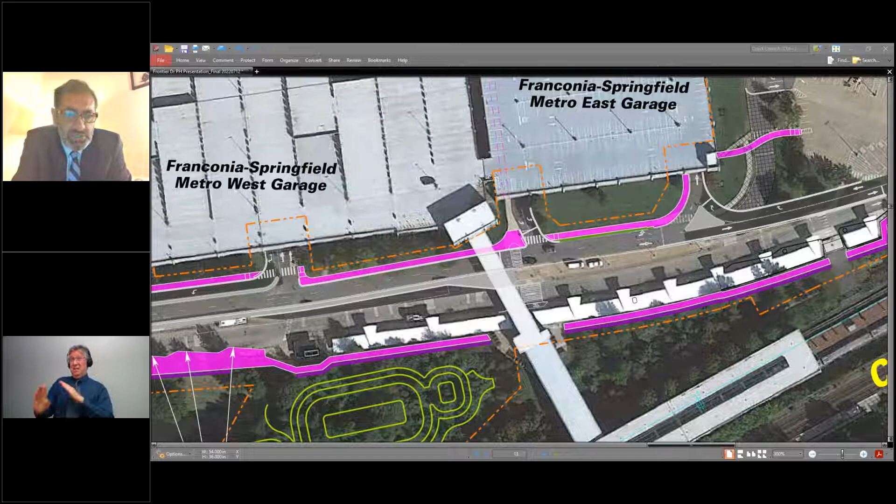And while we're on this slide, let everybody know that in discussion and cooperation with WMATA, we are trying to prevent people from crossing that area west of the bridge without regard to safety, because that is a hazard. So we will probably be putting a fence up on that median through there to prevent people from crossing mid-block. That's purely a safety aspect.

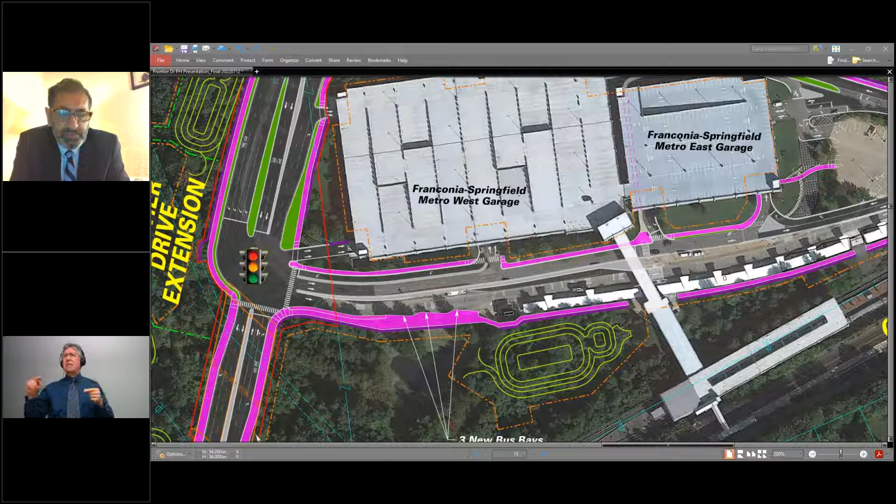Okay, thank you, Zamir. Our next question comes from Rosemary, who asks, what does the 1,610 linear feet of stream impacts encompass? Is the stream being moved or redirected?

We're accounting for the impacts based on the conceptual design. I would defer to the consultant to address whether or not we're looking at piping or other opportunities for stream relocation. A lot of that happens during detailed design, but for now we're looking at the current impacts for permitting purposes. Maybe someone from the design group can address how these impacts will be piped in, or not.

Really, the main stream running through the area is Long Branch itself. There's two streams—it's a fairly small stream, generally fairly easy to avoid. So the 1,600 feet, I think, is kind of the worst case. But right now the design of the bridge is spanning the channel itself, and that will certainly continue to be considered as the project progresses.

So there is no plan to relocate the stream or to have to pipe anything with Long Branch—the bridge will just be spanning it. And I'll add that during the permitting process, regulatory agencies requiring mitigation will request that permit applicants obtain what are referred to as stream credits from an approved stream and wetland mitigation bank. That would happen during the final design process and be a requirement for the agencies before the permits can be authorized to VDOT.

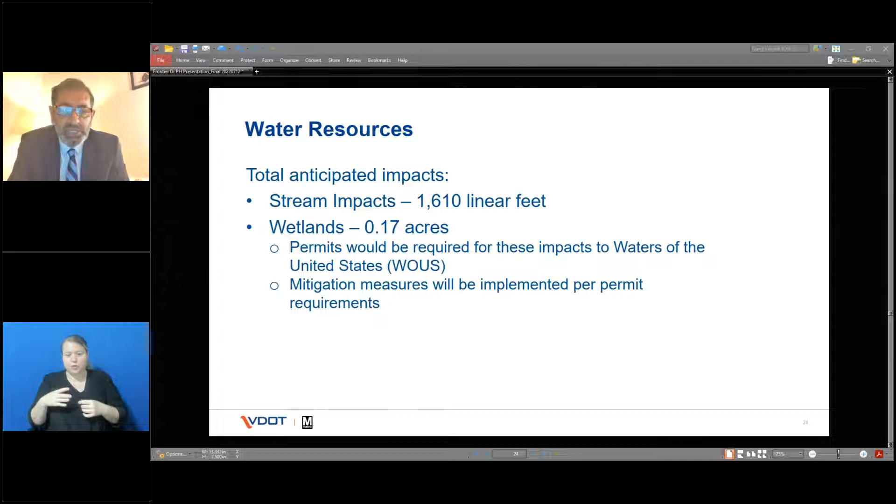Yeah, I think I mentioned that earlier, that the road may appear to get closer to them, but if you look closer at the right-of-way property line, the strip of the area of land is not on their right-of-way. It's on that private property. The road is owned by a private person, and we're acquiring the necessary right-of-way from that owner and not the Layton Drive community.

Thank you, Zamir. Our next comment is from Dana Kaufman, who had tried to speak earlier. Dana is with the Northern Virginia Community College. He says he wishes to thank Delegate Watts, Fairfax County Board Chair Jeff McKay, and Supervisor Rodney Lusk for their early support to have NOVA's concerns addressed. The changes to access to our medical education campus, as proposed by VDOT and county staff, meet our needs. Thank you for listening and taking action.

We have two more questions and then we're going to wrap it up for tonight. Next one comes from Natalie. She says, does VDOT stormwater pond design take into account increased precipitation expected as a result of climate change?

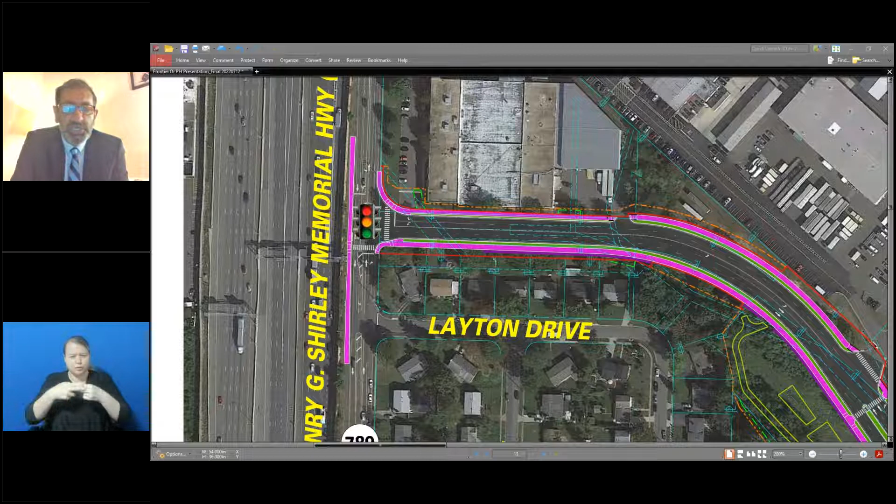When VDOT was given this project, I think it was in 2015, we were requested by the county to manage the design of the selected option that had been studied prior to us. What you see now in terms of the alignment is the development of that preferred option that was studied prior to us managing this project. When VDOT got it, we immediately did the groundwork of picking up the topographic survey and all the utilities that existed in this location.

As the design progressed, we coordinated with the affected property owners. As you know, there are significant federal buildings here, the GSA building, which is the last large warehouse building you see on this slide - they're a significant stakeholder. I believe there was talk at one point where the FBI was going to relocate to this facility when we began this project, and then that idea was shelved. As you can see, there's that white building, which is a U-shaped building that is also a federal occupant of that building, and adjacent to that is the Nova campus.